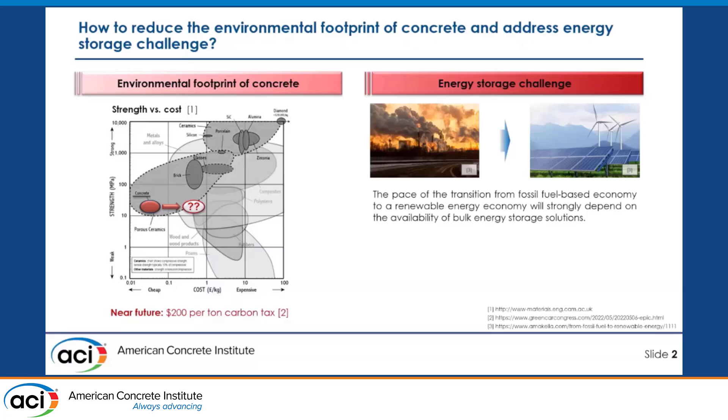The second challenge we are facing is the energy storage challenge. When we want to transition from fossil fuel energies to renewables, we need high bulk energy storage quantities. The reason is we cannot simply control nature - there is a mismatch between supply and demand of energy. When we need more energy from fossil fuels, we simply burn more. But with nature, we have to take it when nature gives it to us, store it, and use it whenever we need it later.

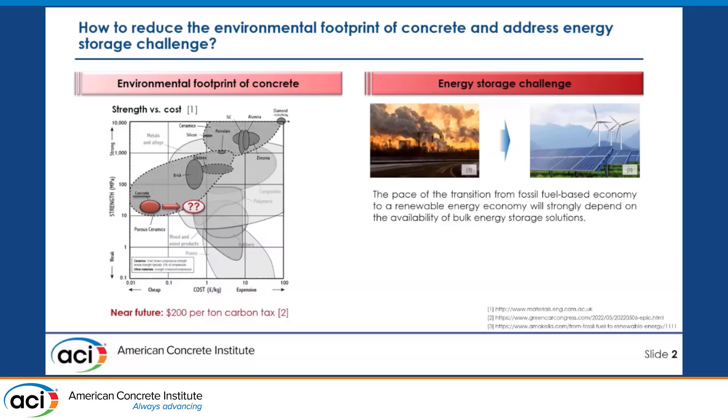So to tackle these two problems, the question is, can we address both? To kill two birds with one stone, we use literally artificial made stone - concrete - which we alter by adding nanocarbon black particles to make it electron conductive carbon concrete, which I'm going to call EC cube.

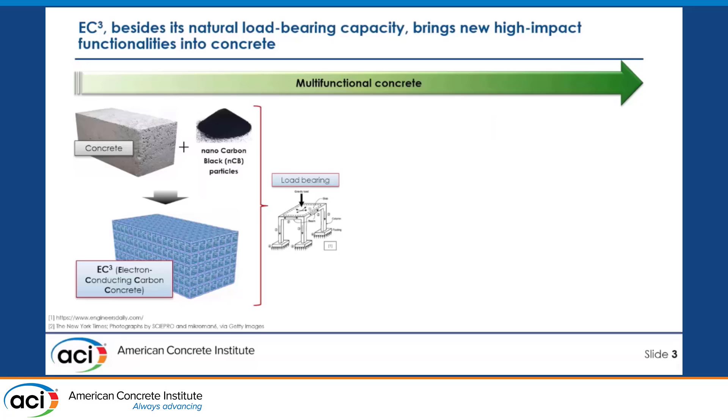This material not only serves as load bearing capacity, but also delivers other high impact functionalities: freeze-thaw resistance due to hydrophobic nature of nanocarbon particles, self-heating due to Joule effect - these two functionalities were well explained by Professor Pellenq in Sunday's session - and it can also serve as shielding against high-power electromagnetic impulses due to Faraday cage effect.

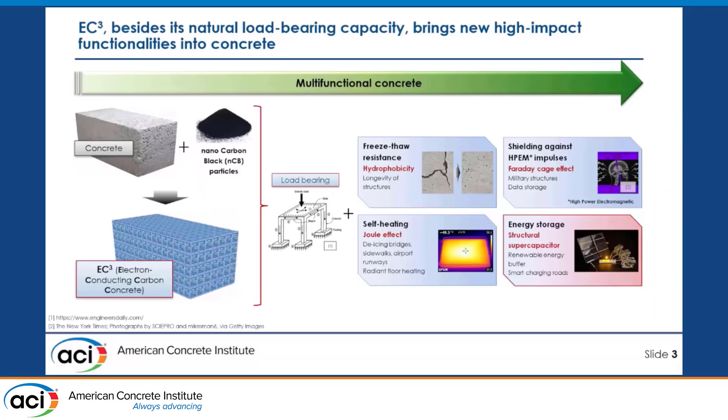But today I'm going to focus on the energy storage. We want to use this EC-cube material as a structural supercapacitor. So imagine if we have an off-grid house powered by solar panels.

As I mentioned before, we need batteries to store energy and use it when needed. Our solution is to use EC cube as existing structural components - foundation, columns, and so on - and get rid of or reduce the amount of batteries. That's how we impact the environment. It's not reducing CO2 when producing this material, but indirectly through CO2 emission reduction due to reduction or elimination of batteries.

How to make EC cube? We use a dry mix, adding nanocarbon particles, which are hydrophobic. Proper dispersion is the key - it clumps with addition of water, but at the same time we don't want to disperse it so much that it creates separate islands. This technology has already been developed, and I cannot take credit for it.

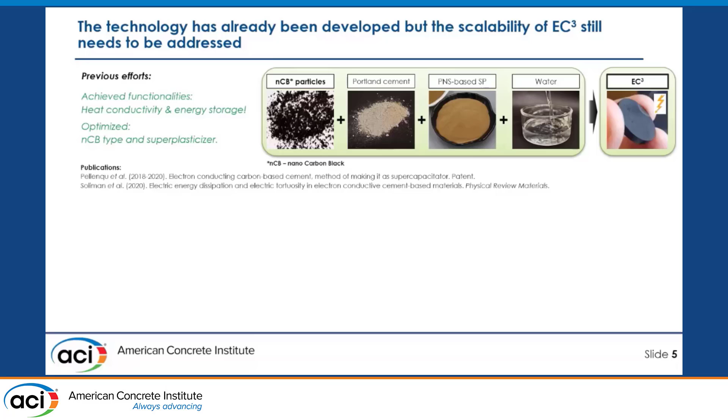Functionalities were presented in the patent from 2020, Pellenq et al. - heat conductivity, energy storage. There was also an optimization of nanocarbon type superplasticizer paper in 2020.

But what I want to talk about today is the scalability of this material, because if we cannot transition our invention from the small scale laboratory to industrial application, then all is in vain.

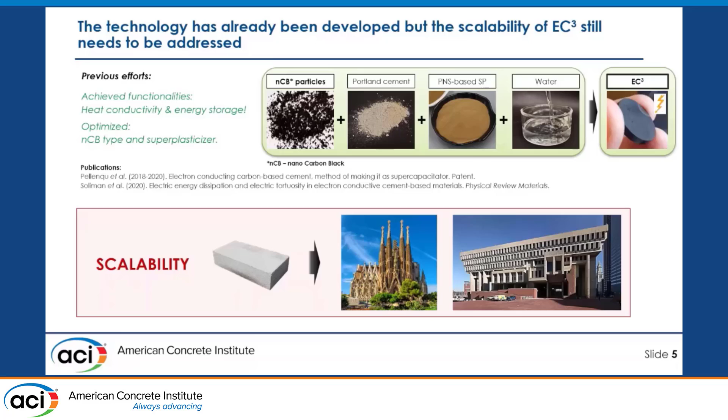Before moving forward to scalability, we explored how nanocarbon particles form that conductive network in our material. We used correlative EDS and Raman spectroscopy techniques - Raman gave us easy access to differentiate nanocarbon particles, characterized by specific Raman spectra with D and G bands, and then differentiate them from other clinker phases or hydration products.

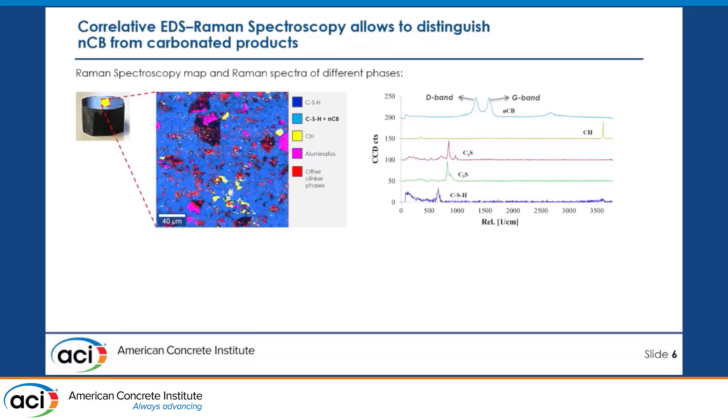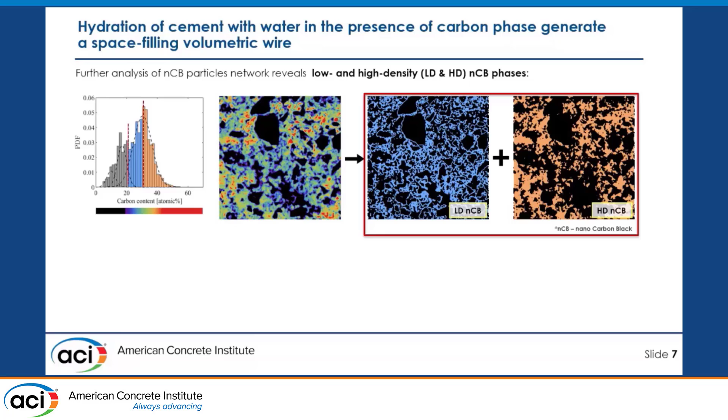With further analysis, we could distinguish between low and high density, or more precisely low and high concentration nanocarbon network, which is basically the phase of nanocarbon particles intermixed with hydration products - CSH, Portlandite, and so on. What's also remarkable is that this space filling volumetric network is present at different length scales, showing us fractal dimension.

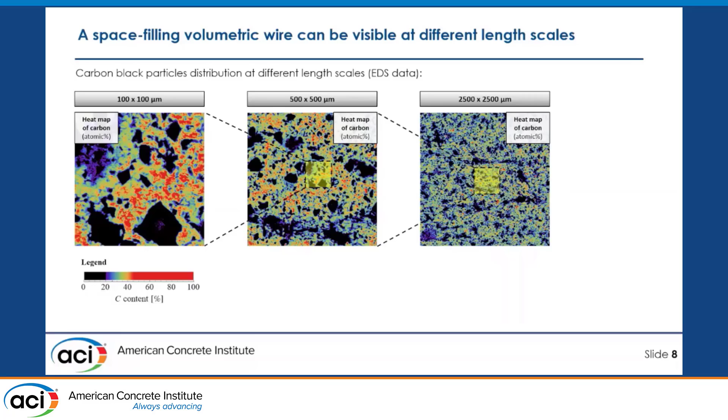Analysis of these two phases, low density and high density concentration phases, we employed statistical descriptors, namely two-point probability correlation function. We obtained mean chord length, which can be seen linearly scales with the concentration of nanocarbon particles. This is indicative of a unique specific texture of these phases.

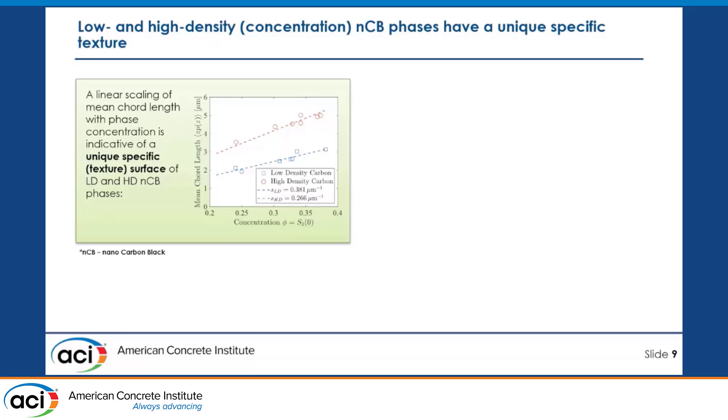At the same time this shows us that no matter what type of nanocarbon black we use, or the concentration, the whole process is repetitive, highly repetitive, and reproducible at different configurations. Currently, we are also investigating it in 3D using FIB-SEM techniques to further increase the resolution.

So now let me move to when we see that this material can be used as electron conductive material. Now the question is how we can employ it and use it as energy storage. We use it as energy storage as a supercapacitor. A supercapacitor functions the same as a battery to store energy, but how they work is completely different. Batteries work based on chemical processes, while supercapacitors work on the double layer effect.

Three main components of a supercapacitor: electrodes separated by a separator, and all soaked in electrolyte. The electrolyte is that medium that carries ions. In this assembly, the carbon cement composite plays the role of the electrode, while hydration porosity serves for transport.

Here's the CT image from the Soleil Synchrotron Paris, which shows that more than 90% of hydration porosity is interconnected. That gives us the possibility that ions can reach the nanocarbon particles.

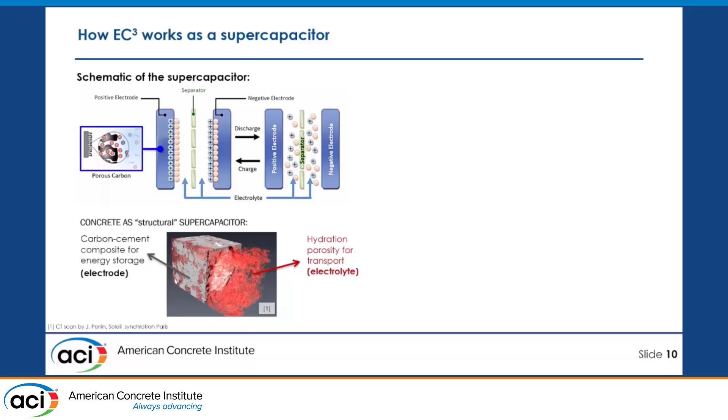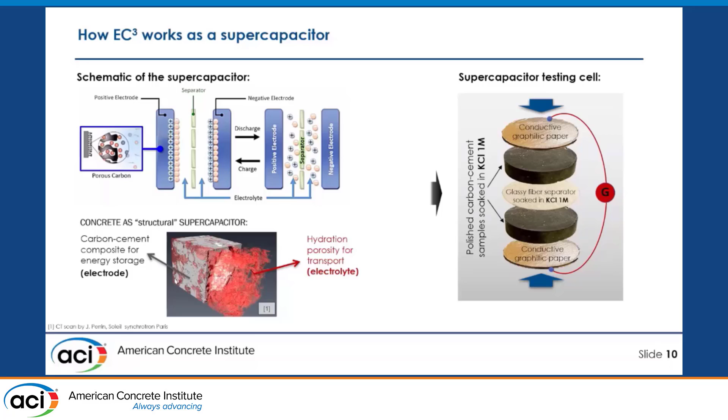Here we can see that in our EC³ material, two electrodes are separated by a glassy fiber separator, and all is soaked in electrolyte. An exemplary electrolyte can be KCl solution of different concentrations.

When we want to quantify how much energy we can actually store, this is the key point, we perform galvanostatic charge-discharge tests and cyclic voltammetry tests. Here I'm presenting just CV curves, where we applied a constant rate of voltage and we monitor current.

While charging and discharging, we have those loops, hysteresis, and the area under these curves gives us information on how much energy we can store. Then we perform these tests at different scan rates, and we can reach a rate-independent capacitance. This is important since we want to obtain values which are invariant with laboratory conditions.

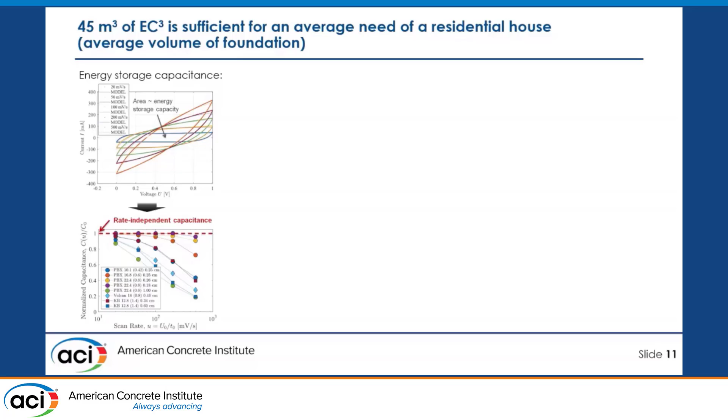Further, we are showing that rate-independent capacitance can be scaled with a dimensionless diffusion variable. We can see that all experimental results for different water-to-cement ratios, different nanocarbon black characterized by different specific surface, and also, extremely important, different thicknesses and different sample sizes, because this is a diffusion-driven process.

You can see that they all align with the mathematical model error function, and based on this we can make an estimate that it can store roughly between 20 to 220 watt-hours per meter cubed. I can tell you right away that this value is extremely low when we compare it to regular supercapacitors.

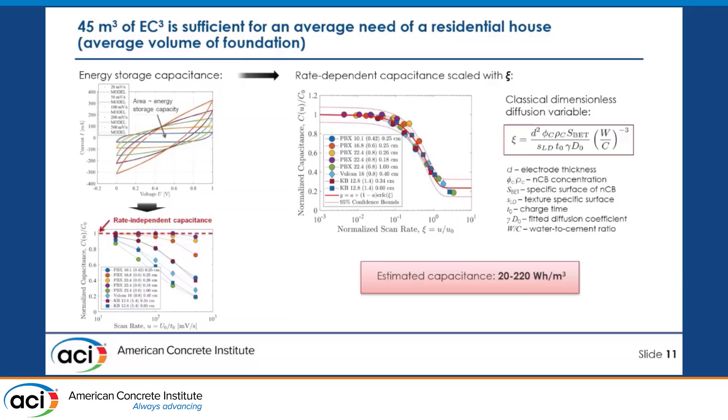Nevertheless, we need to keep in mind how much concrete we are using in our structures. Then these numbers can play a significant role, because 45 meters cubed of this material can be enough for the average need of a residential house. That's a very important message.

In the whole story, I talk a lot about the electrode, but I mentioned that the supercapacitor is also composed of electrolyte, because all is soaked in electrolyte. There are many different types of electrolyte that could be used, but we have to identify the one with specific properties: high diffusion coefficient, high ionic conductivity, negligible effect on our material, and relatively low cost.

The last two factors are the most important since we want to use it as a bulk supercapacitor, so we're going to use a lot of electrolyte. I totally agree with the Nano Energy paper where they mentioned that no perfect electrolyte has yet been developed, especially for this unique application which we are presenting now.

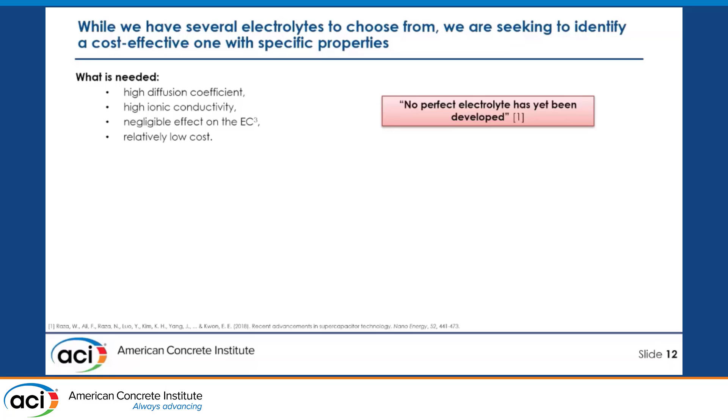There are multiple options: aqueous, organic solvents, ionic liquid, gel-like forms, and so on. Based on these four properties, we selected a few of them: potassium chloride solution, also one based on propylene carbonate, and gel form of KCl solution.

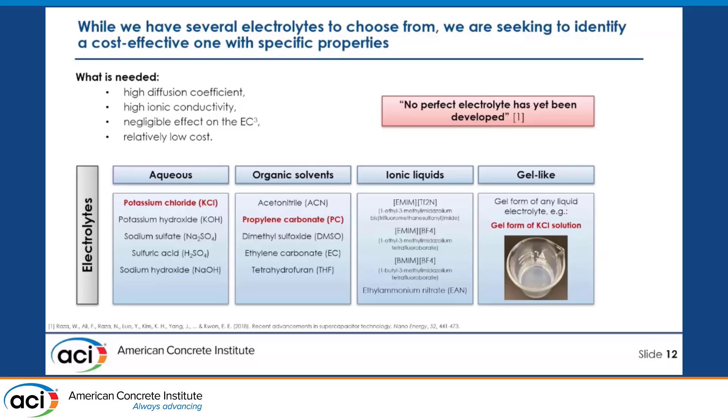Nevertheless, we cannot exceed more than 1.23 volts for water, to avoid splitting water into hydrogen and oxygen. With organic solvents, we can reach higher voltage windows, so that gives us an advantage.

So first we used organic solvent, and with just one supercapacitor cell we were able to get more than 2 volts. We were able to light an LED. That was a very important date to me, 5th of May, Cinco de Mayo this year. A very exciting experience, I have to say.

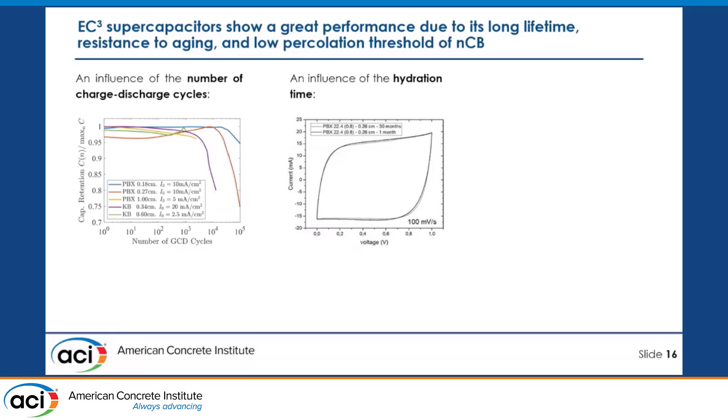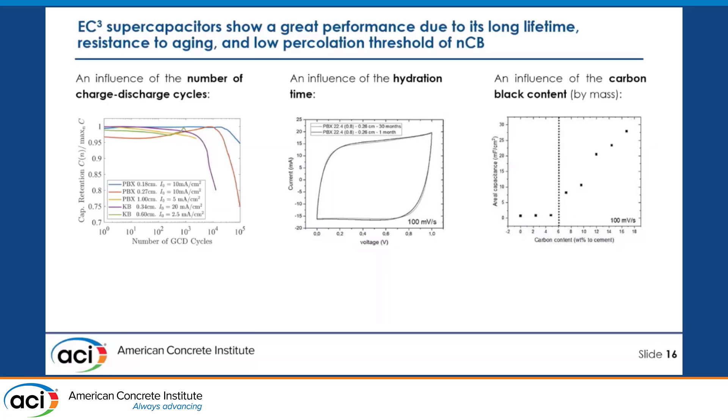Also, how hydration time can affect capacitance - tests performed after 1 month and 30 months showed comparable capacitance, which is also extremely important. And then I'm showing the percolation threshold, which is needed to obtain that capacitance and energy storage functionality. It's slightly higher than when it comes to just conductive functionality, but still it's low.

So here I hope I showed and delivered the message that this EC3 technology exhibits promising scalability, spanning from 1 volt to 12 volts and so on, from cement paste to mortar. It shows a range of potential applications and brings us closer to the most important goal, which is transition from a fossil fuel-based economy to renewables.

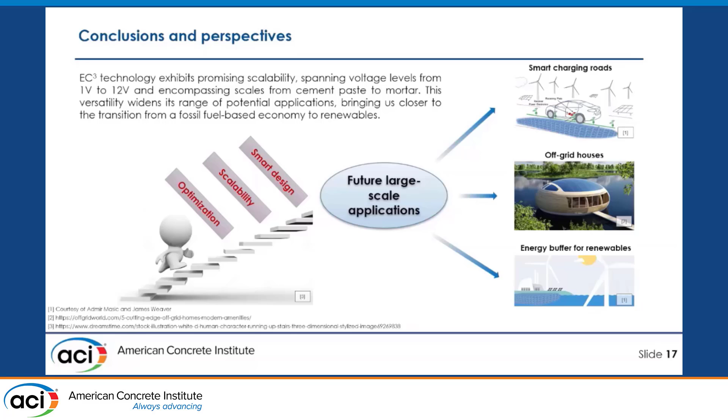So now, as Professor Ulm says, engineering starts now. It's all about optimization, further scalability, smart design, that can lead us to future large-scale applications: off-grid houses, energy buffer for renewables, and high-end applications like smart charging roads, which is more tricky since we have to switch from DC to AC technology and high frequencies. Nevertheless, it's also an option we are exploring.